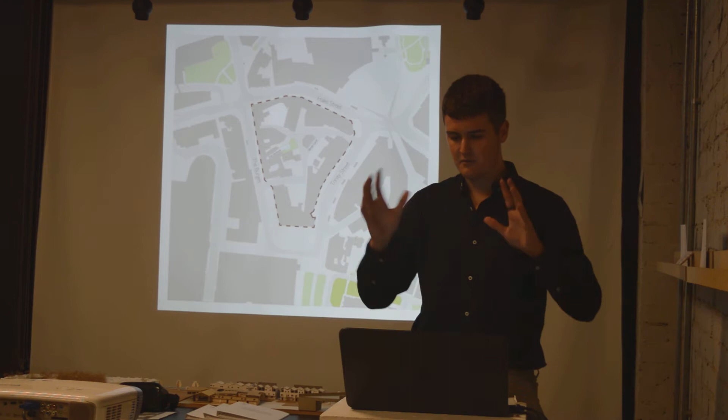Through a research project we did previously, I found Palmer Lane, which you would describe as the inner workings of an urban block. These are all high streets, commercial high streets around the sides of the block, so it's really the backside of that. It happens to be the home to the only unculverted section of the River Sherbourne within the city centre, so in 1968 the whole lot was paved over apart from this wonderful little bit here.

Initially, I really wanted to dive right into a detailed interrogation of the site's opportunities and try and focus on those as opposed to the pitfalls. When you're getting involved with a challenging site, it's easy to see, oh, that's going to be an issue, that's going to be an issue. I really wanted to focus in on where the opportunities were.

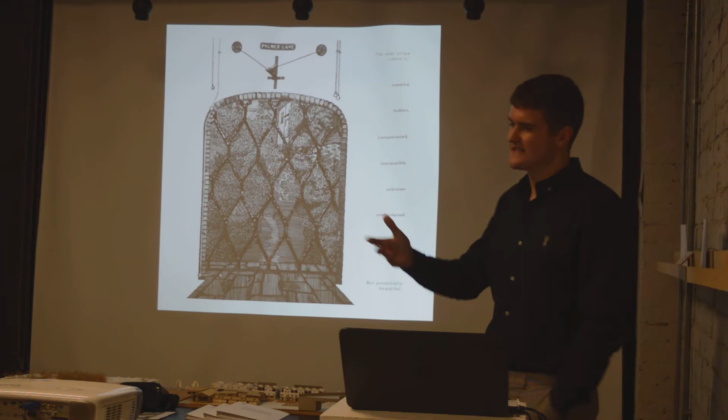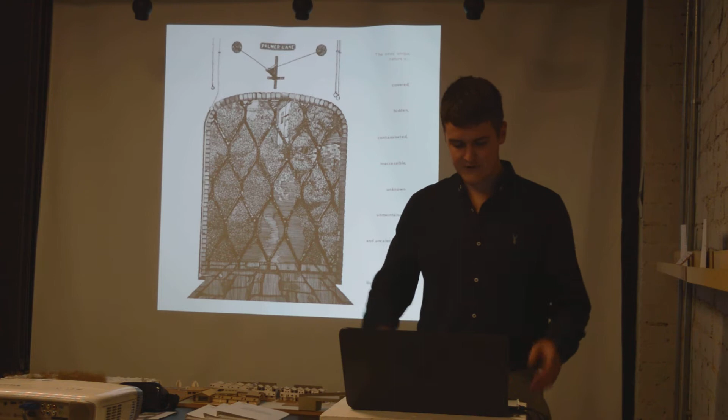The first decision I made was that I really wanted to bring this river back to the city, extend it across the site, because currently it's blocked off, it's unused, you can't access it, you can barely see it, and it's just a real shame because historically it was such an important part of Coventry. It's the reason why people in the first place were able to settle in the area. So I really wanted to reconnect the people back to the history.

The second focus is obviously the brief. The rate of homelessness in Coventry is 3 times the UK average, but more specifically, 52% of those homeless households are single mother families, which I found shocking. So what I proposed was a co-housing scheme for these families who are suffering. They're in a cycle of temporary accommodation, essentially, where they're never in one place long enough to get back on their feet to then progress forward.

What I would call my model is true co-housing. So essentially, the families would share everything apart from the main essential private spaces, such as your bedroom and your bathroom. The idea of these families sharing everything is that they're constantly engaging with one another, constantly getting this feeling of support and stability because they're always around these other people who are going through essentially the same struggles as they are.

Alongside the housing, there is a mixed-use portion. There is a public high street market through the centre of the scheme, which would be run by the women of the community as a means for them, financially, to try and get themselves back on their feet and push them in the right direction.

Design-wise, my entire design was completely narrative-driven, so I collected real stories from women who either currently or have previously been single parents. I really tried to hone in on the positives, not the negatives. It was all about positive memories from them as a family or their own unique stories, which then inspired individual concepts for small shared spaces within the scheme.

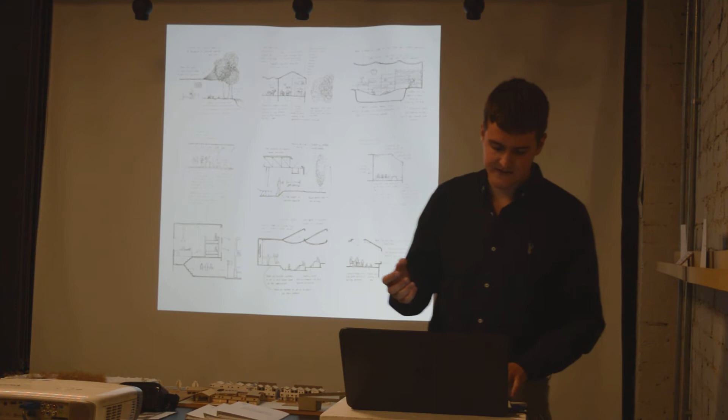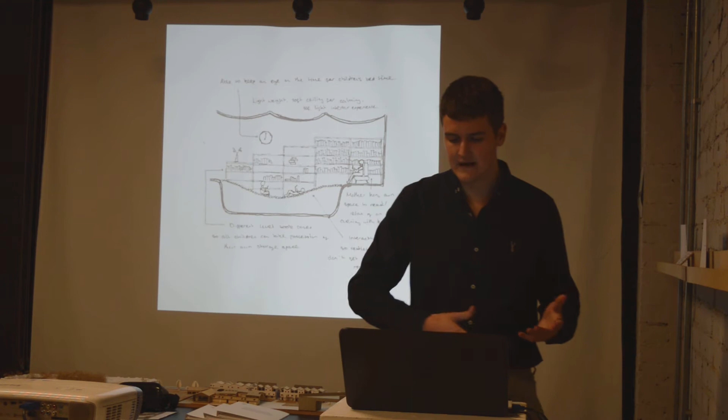So these are a few examples. I'll take you through one. This is a reading space. I had a story from a woman who spoke about bonding with her children when she first became a single mother, bonding with her children over reading, either just reading individually in a space, or her reading to them, or them even reading to her. Such a simple thing, but it inspired one of these small shared spaces.

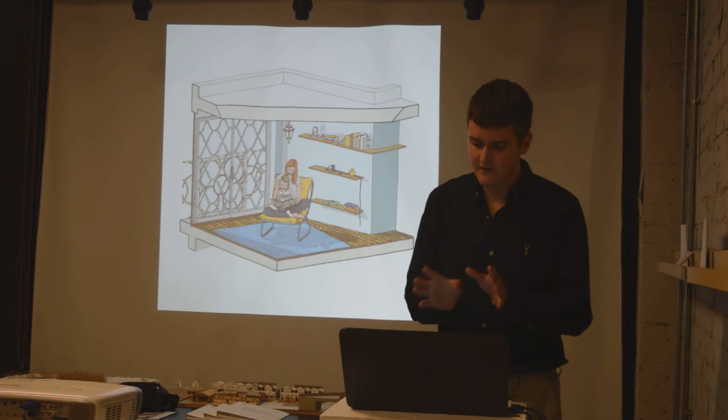Moving forward, each of the shared spaces I then looked at through drawing, trying to look at different scales of space, spatial qualities, but also how they could be offset from larger spaces rather than being an enclosed room, how they could be offset and still engage with other things happening in the building at the same time.

I then did use modelling to look at materialities, and again integration and how one space might relate to other spaces, but also the relationship between the space and the outside, which I thought was really important, between the building and the public realm, but also the building and private outdoor spaces.

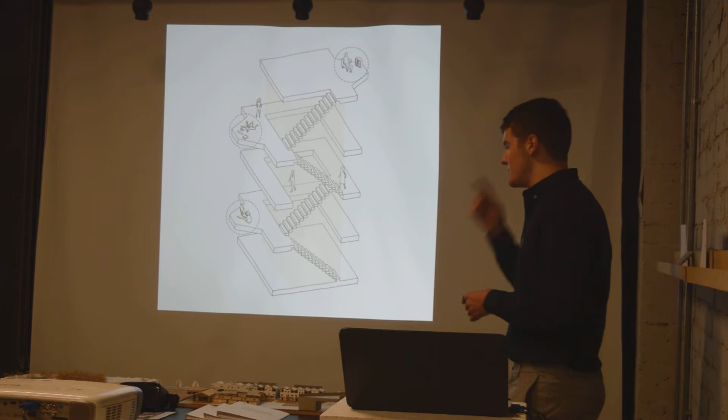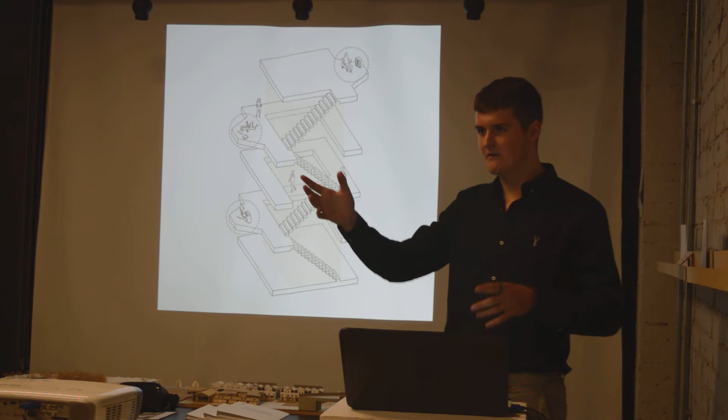The idea was that all of these smaller communal spaces would be within each of the 5 houses, offset from the main circulation of the house. So as opposed to being a separate room, it's really offset within circulation. As people pass through the building every day, you're constantly engaging with other activities, with other families, seeing other people, having conversations, and I really wanted to force this.

I didn't want there to be an opportunity for anyone to fall into a sense of loneliness, or depending on their character, they might shy away from deliberately getting to know other people, but the idea is that you essentially don't have a choice. You are always integrating with everybody within the community.

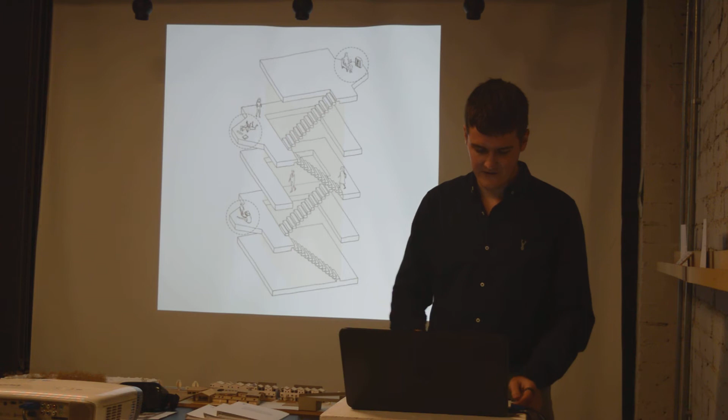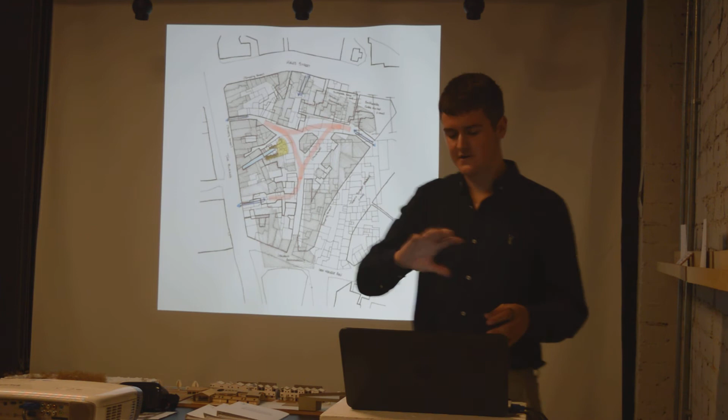Through the design, I jumped a lot between, trying to continuously challenge myself by jumping between that micro detailed scale of small ideas and spaces to the master plan overall scale. One of the first things I did was a historical mapping, layering, to try and analyse how the site's changed in the last 120 years, from 1900 through to the present.

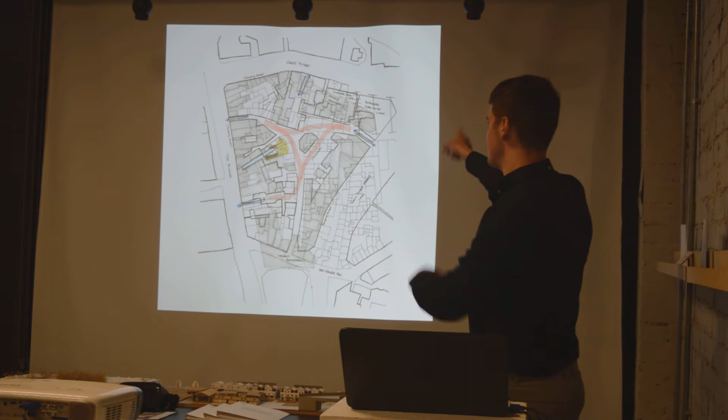One of the themes I grabbed right away was this use of small, intricate streets with small housing units organised around what would originally form the block. You can see how originally these spaces are a lot smaller, much more intricate, and then through the Blitz, and then commercialisation of the surrounding high streets, it's become a lot more open within the inside of the block.

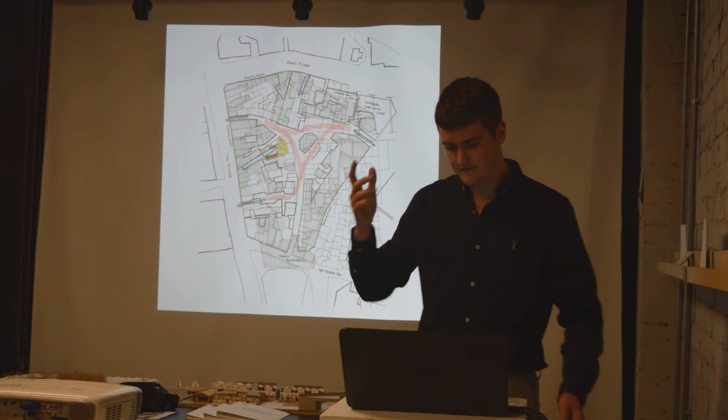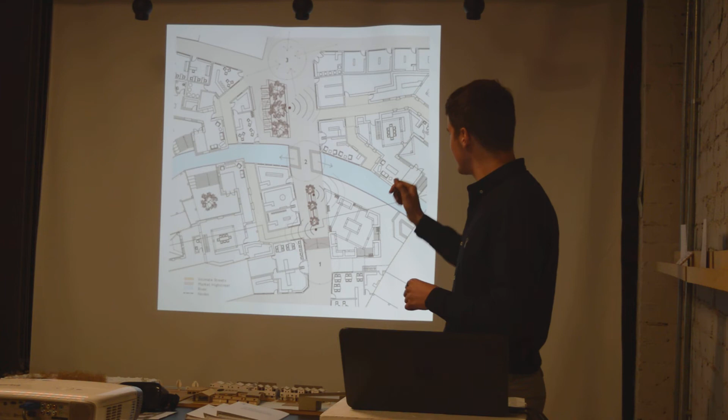That straight away inspired the layout for the high street in the middle of the scheme. It was quite surprising, the scale of the housing lent itself really well to the scale of these small market style shops that form the high street.

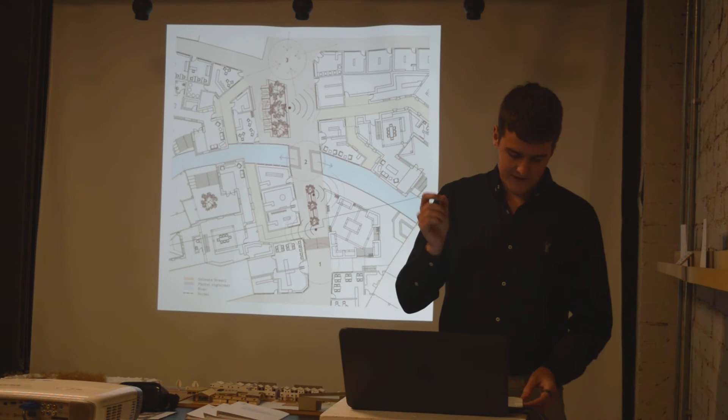The public realm itself is formed of three different nodes. Number one is this raised entrance level, where when you come in from the Burges you enter at a raised level, you get this sense of arrival, and you view everything that's happening within the street and around.

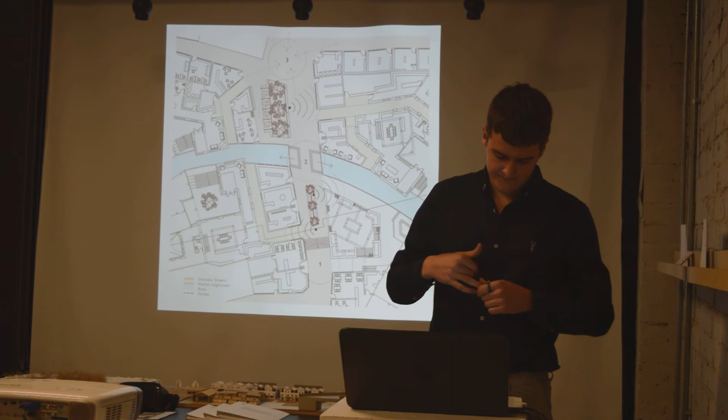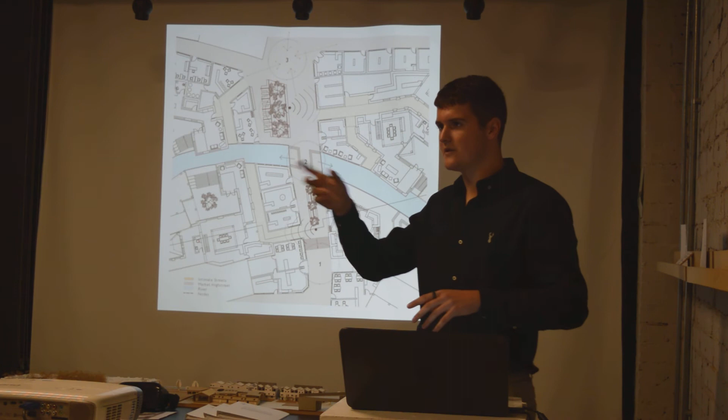Number two is the bridge that passes you over the now extended river across the site. That's a place to stop, to see where you've been, see where you might go next, but also get these amazing views down the river, the activity of the public, the shops, but also the private. You see little glimpses of the housing.

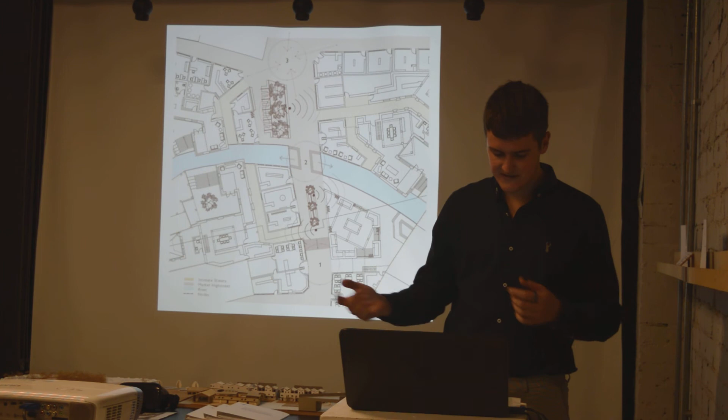And then number three is the point where all four paths, entranceways, merge to form almost more of a square. So you've got a street leading into a square, a place for people to meet, for social interactions, but also to try and promote social activities.

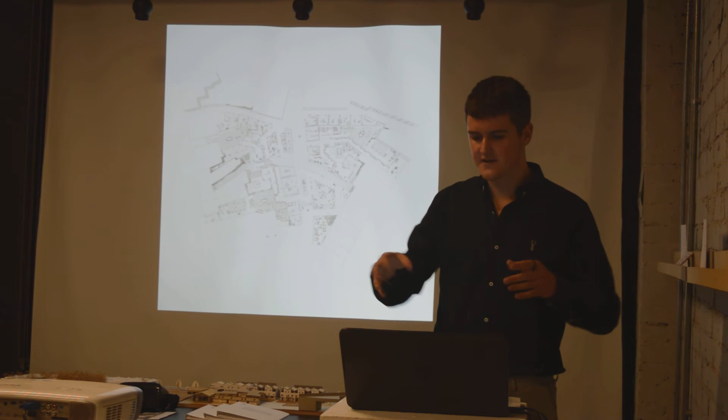The idea is that you get a real sense of the scheme grafting into the site and growth, so it begins to break through and grow over the actual existing site and re-engage with the public surrounding the site.

So what I'm going to do, because this is quite a difficult scale, is just delve into a few moments within the scheme to talk about.

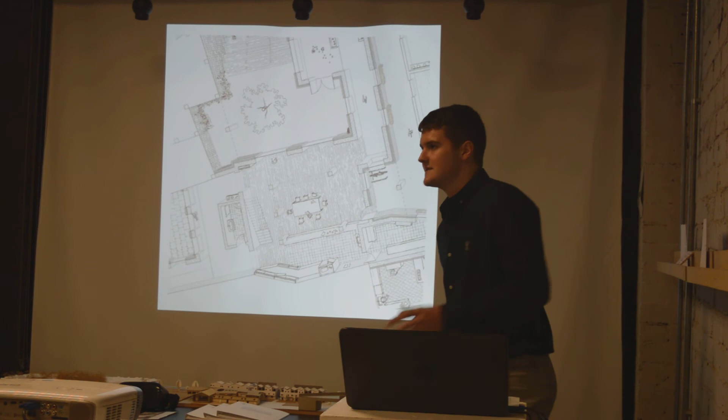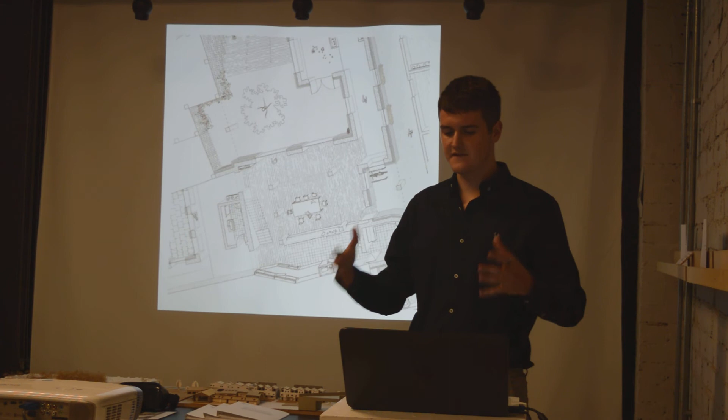This is an example of one of the living spaces, a ground floor living space, where a family would come in, and above that central dining space is where that circulation would form, and offset from there would be these shared spaces. One thing I didn't say before was that the circulation space is also a way of drawing light down through the building into this ground floor, because of the confined nature of the site. Bringing as much light in as possible was really important for me.

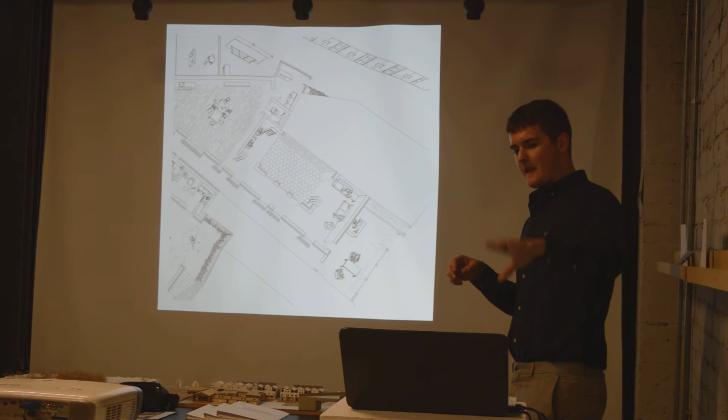This is an example of one of the locations where the scheme itself actually breaks through the site, the surrounding block, and engages with the public. The idea is that as it breaks through, the public gets glimpses of activity inside, but it also breathes a real new life to the high streets.

The Burges and Trinity Street, which are either side of the block, used to be thriving commercial streets, and they've unfortunately died a bit of a death. This is an attempt to bring new life and also new intrigue to people as they pass down the street, seeing something's happening behind there, and then as you move around you see it's an extension of these already existing commercial high streets.

This is again the public space, so this is the main square. Within that space, the idea is that you're surrounded by what the shops create, this public frontage, which is your buffer between the large public space and then the private behind, where the housing is.

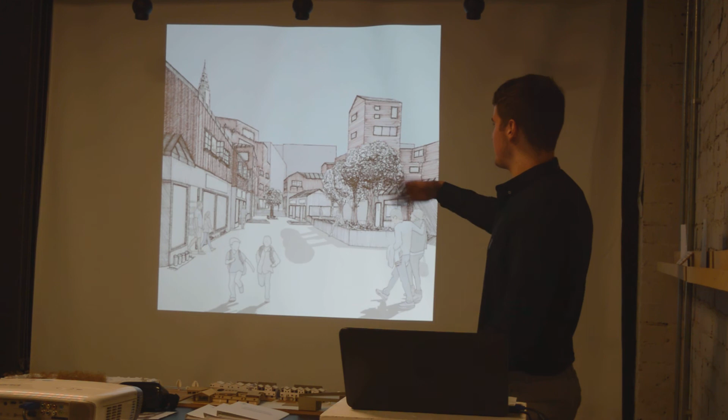But also the materiality of the two is supposed to contrast, to give that sense of difference in function, but also the contrast between the concrete being the public shops and then the timber being the much more private housing behind.

And then this is one of the moments where two of the houses relate to each other, they connect over the river, so families would interact from either side.

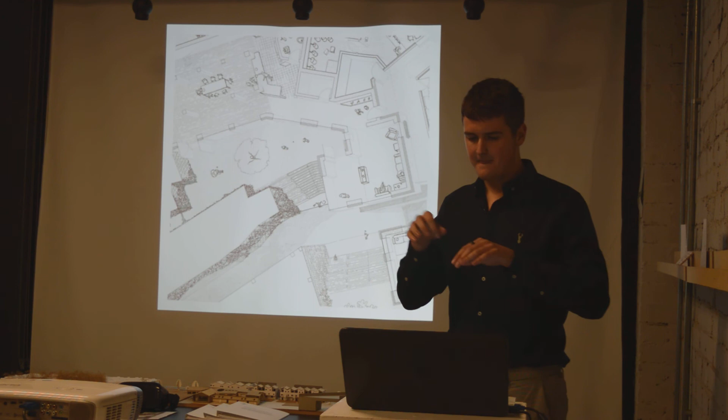Again, it shows an example of how I tried, where I could, to punch into this. Essentially, when I started, I had to merge my scheme in wherever I could because there were a lot of limitations. So then, once I'd done that, I then tried to pick out where I could drop in these areas, these small gardens or connections back to nature for those houses in the scheme.

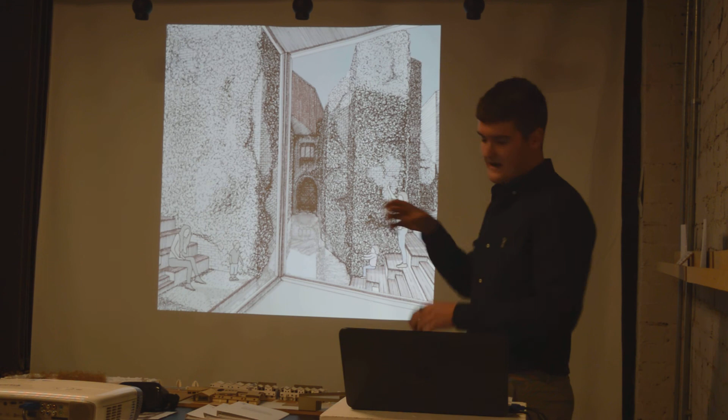And then this, in that one specific example, is the unique view that they get from their living space down the river to where the river's culverted under the city.

So just quickly, I started with my two main aims, but I think I finished essentially with three themes. The first being that I wanted to evoke new ideas about where opportunities can be found within an urban context.

Secondly, I wanted to reconnect Coventry and its people to the river, but also to its history of trade and its trade culture. But thirdly, and most importantly, just to give a new lease of life for these families and an opportunity for them to get back on their feet and move forward.